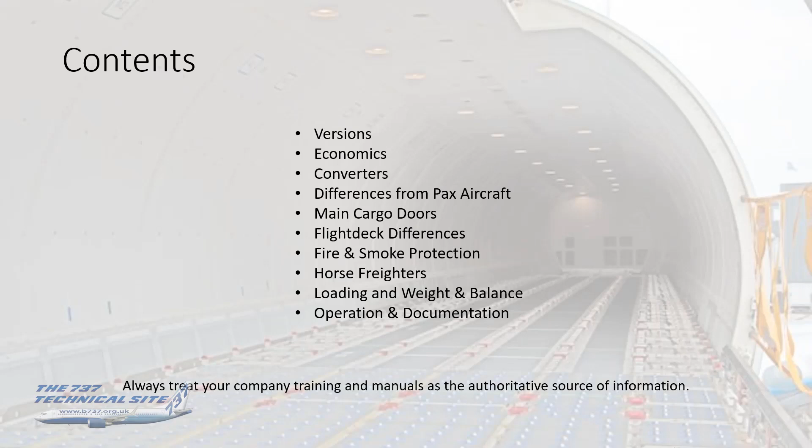Okay, so on with the show. Let's look at the different versions of 737 cargo aircraft there have been.

First of all, let's get this out of the way: are they freighter aircraft or cargo aircraft? The terms seem to be interchangeable. In English, a freighter is the aircraft and the cargo is what's carried in it, but the two terms do seem to be interchangeable. The reason I raise it is that some cargo 737s have got the suffix C and some have got the suffix F, depending on the model and the converter. I will go through the nomenclature as we come to it later in the presentation.

Pure freighters, or all-cargo aircraft, have the entire passenger deck configured to carry freight and a main cargo door just after door 1 left for pallet loading, as you see in this photo here, looking from the front of the cabin down to the back.

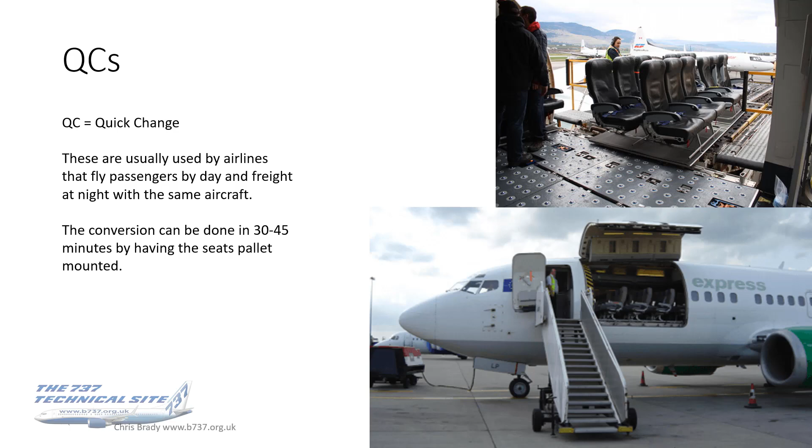So it's the quickest and easiest form of cargo conversion. It takes two people about 10 minutes to do the whole cabin—you just use a regular passenger aircraft, place these fabric hammocks over the seats, and then the team loads mail bags onto them, throwing them on and taking them off at the end of the flight. On these, we used to carry a member of cabin crew as a nominated fireman who sat in the back looking out for any signs of smoke or fire. So that's a kind of hybrid, if you like, cargo aircraft.

Just to summarise the main versions: F generally stands for freighter, a generic name for a pure cargo aircraft. C can confusingly either stand for cargo convertible, usually Boeing terminology, or combi, an aircraft with a passenger and a cargo area. QCs are quick changes, aircraft that can be quickly, in less than an hour, converted back to passenger ops from cargo.

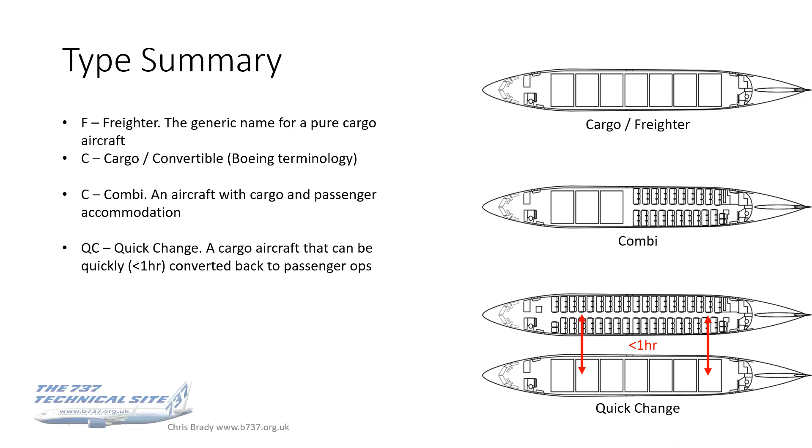So none of the Boeing built originals were pure freighters. They were all either convertible or quick change, which is why the terminology on here is all 737-100 or 200C, covering both C and QC.

I say that they offered these actually before this document - the earliest documentation I've seen was in April 1966, a full year before the first flight of the 737, and the first one was delivered to Wien Consolidated in September '68. So they were fairly quick off the mark in ordering one, and I believe some of those aircraft are still flying in Canada today.

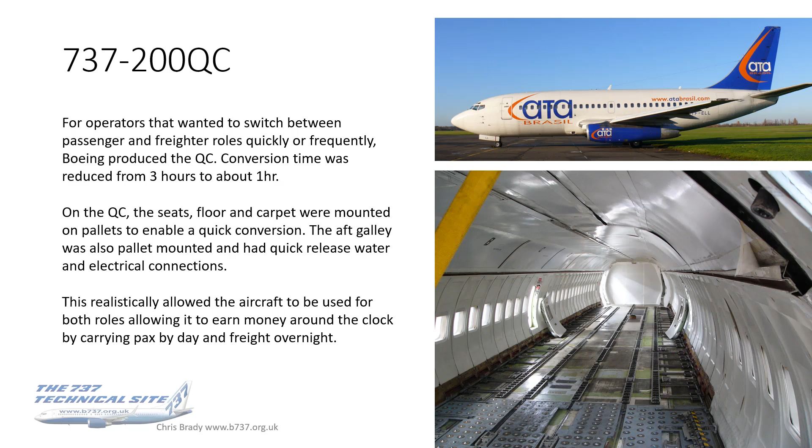So next up were the Classics. Now, surprisingly, Boeing never built a Classic freighter. That said, there have been more Classics converted into freighters than any other generation of 737 - it's just Boeing didn't do it, and it was all done from the second-hand market. Of all the Classics, the 400 is the most successful series, as it's got more cabin volume for cargo, as you would expect. If you're going to make a freighter, might as well make a big one.

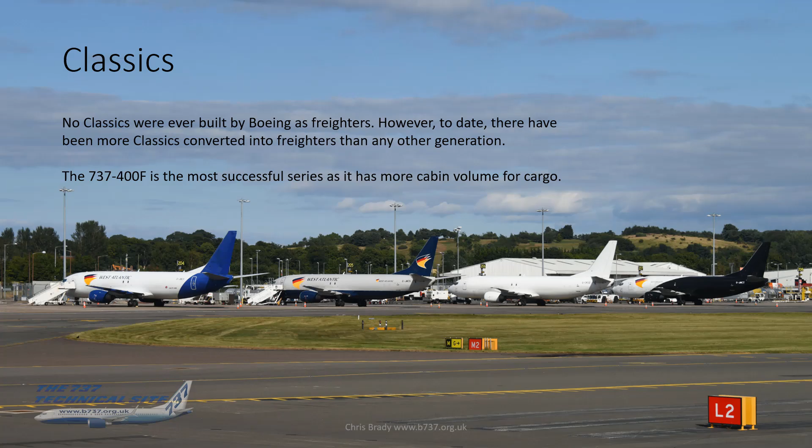So on to the NGs. NGs are now becoming much more popular for freighter conversion than the classics, because of all the same reasons that they became much more popular as passenger aircraft. They got better fuel consumption, payload, and reliability over the classics. And as the NGs are getting older, they're coming down in price as well.

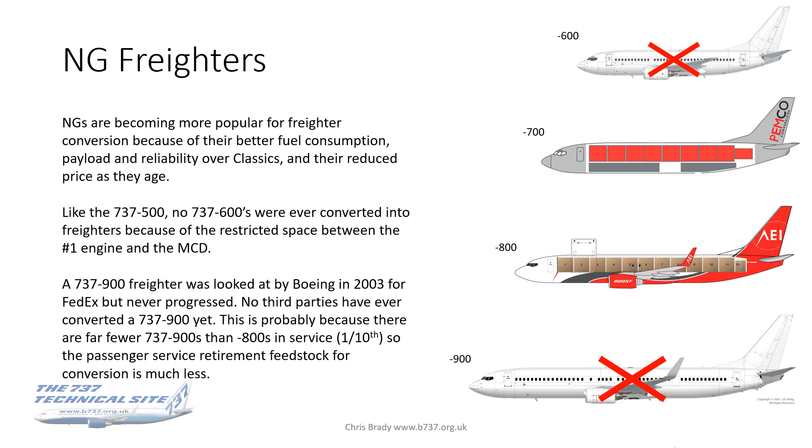Pallet space. So the number of pallets that a type can take actually varies slightly depending on the model. A 700 can take 8 standard AAA pallets and a smaller one behind it. The 800, depending on which conversion was done, and who did the conversion and which particular one you went for, can take anywhere between 9 and 11 standard pallets plus a small one behind that. The 900, if it was ever produced, and never say never, could take one extra full-size pallet over an 800.

All right, so let's look at the 700C. Now, this was the only Boeing produced cargo 737 from new, other than the 200C. So, as I say, straight from the factory, there's only been this and the 200. All the rest are conversions of used aircraft.

The 700C is based on the 700 IGW, the increased gross weight version, which, if you saw the BBJ video that I produced, the BBJ is from the IGW family, as also is the 737-700 ER. The ER, the BBJ, and the convertible all have the 700 fuselage and the 800 wings and strengthened gear, to basically get an economical payload on that. That's what that's all about.

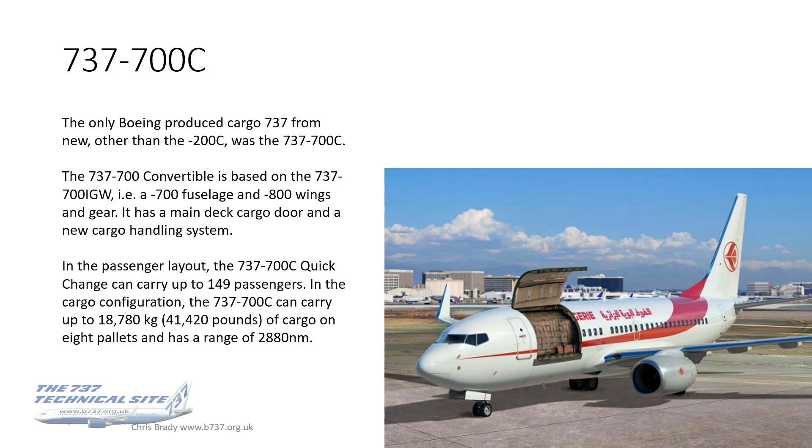It was launched in '97, so fairly soon after the NG program was launched. But it only actually got 3 civilian customers: Saudi Aramco, Sonair, and Air Algerie, which you saw on the previous slide. Last delivery of those was in 2016. The big sales actually went to the US military, where it's known as the C-40, as per this photo here, and one ended up as a BBJC. But total sales were only 21 of those.

Interestingly, if you look at this photo, courtesy of Mark McEwen, you can see that the overhead bins, the hat racks and things, are still in place for this. So that's probably the big difference between the convertibles and the pure freighters, is that the roof space, the ceiling space is more restricted on these. You don't have the full ceiling height.

There is a quick change option, again with pallet mounted seats. This reduces the conversion time from 5 hours on the 700 down to about an hour. As previously mentioned, and as you can see in this photo, the ceiling, sidewalls, and overhead bins remain in the interior when the aircraft is both configured and used for cargo operations.

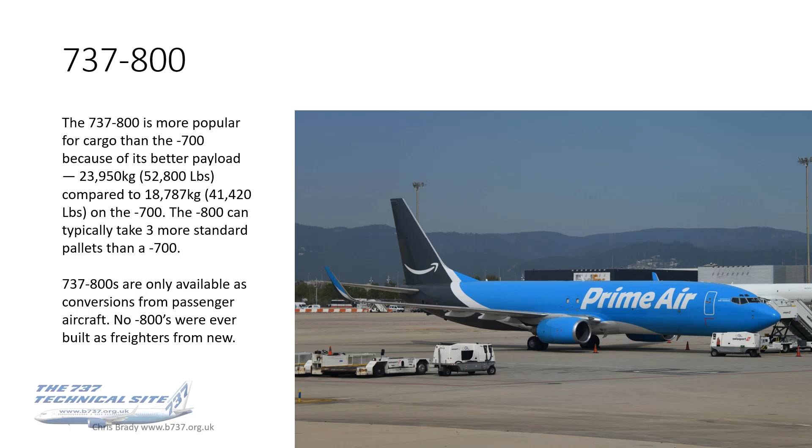Max freighters - these are a long way off. There are no plans for Max freighters yet, either new or converted, and this is simply due to economics. The Max is still young, and it can earn a whole lot more as a passenger aircraft than it ever could as a freighter. Also, there's just no second-hand Maxes on the market for conversion yet. I think it's just short of a 3,000 aircraft backlog on the Max at the moment, so there's certainly none going to become available for freighters. I would estimate within at least a decade, if not 15 years or so.

So we've mentioned the economics of passenger versus cargo aircraft. Let's have a quick look at that, and hopefully we can work out why cargo aircraft are generally older than passenger ones. Cargo aircraft are very rarely manufactured new straight off the production line. There were 90 odd 200s and about 20 odd 700s out of 15,000 737s, so it's a tiny minority that were ever made new. Usually what happens is they operate as passenger aircraft for 10 or 20 years before being converted into a freighter.

Why is that? Because they can earn more money flying passengers than freight. And why is that? Because passenger flying is much more intensive - it's more round the clock, it can be 24/7, depending what airline you work for. Fortunately, I haven't had to fly for one of those. But freighters typically only fly about maybe 4 hours a night for 5 days a week. There's very little freight movement at the weekend - it's mostly midweek, mostly in the middle of the night.

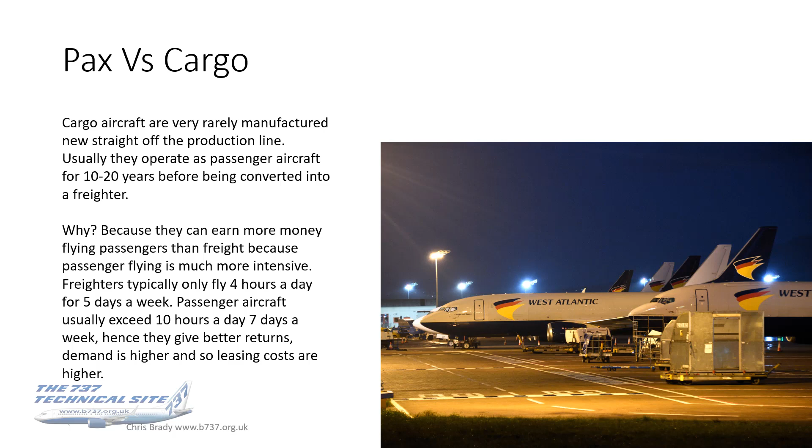Passenger aircraft, though, work from - well, I don't need to tell you what your rosters are like - but an early shift can start around 5-6 in the morning, and you can be flying up until 3 the following morning. So the passenger aircraft will put in at least 10 hours a day, often more, 7 days a week. So they give better returns for the money, because they're simply doing more flying. Because of that, demand is higher, and so the leasing or purchase price for 737s is higher on those aircraft.

So let's have a quick chat about leasing costs. In case you don't know, very few airliners are owned outright by the airline. Usually what happens is an airline may place an order with the manufacturer, and they may even buy it from the manufacturer. But certainly the airlines I've worked for, what happens is you do this sort of sell and leaseback process - you buy the aircraft from Boeing, then immediately, before you've even taken delivery of it, you sell it to a leasing company like GECAS or whoever, and they then lease it back to you. So why is that done? Because airlines just don't have the amount of money in the coffers to buy a fleet of aircraft outright.

So they lease - same as you might do with a car, depending on your financial situation.

Most aircraft are leased. As the aircraft get older, their leasing costs, or the outright purchase price, drops. When it reaches a figure that the freight market will sustain - and going back to the previous slide, freight margins are tighter than passenger margins - the aircraft get converted into freighters.

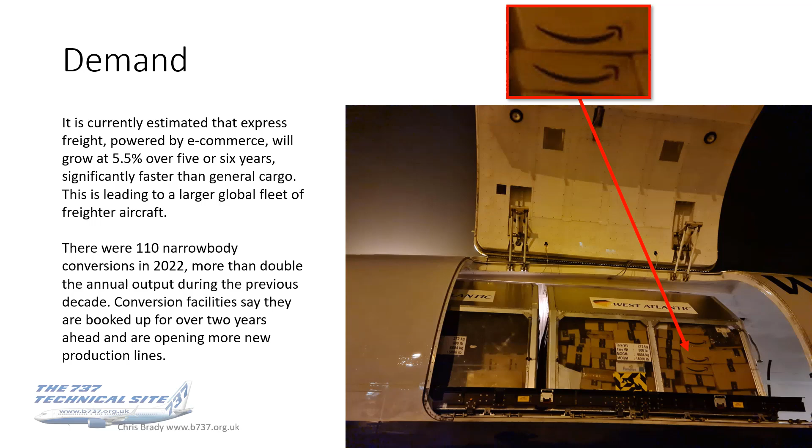Conversion facilities say they're booked up for over two years ahead, and they're opening more new production lines all around the world - on almost a monthly basis, to be honest, between all the converters.

So we've spoken about leasing costs, but let's have a look at the outright cost of a freighter. You can buy a 20-year-old used 737-800 for around $15 million, give or take. The P2F - passenger to freighter conversion - is around the $3.7 million mark.

You will probably want to do a C check on it too, the heavy maintenance check, because that's probably going to be due, and it's a good time to do it while you've got the aircraft stripped apart. In fact, it's probably part of the reason why the aircraft became available on the market anyway - the C check was coming up. So either end of lease or conversion to a freighter is the perfect time to do a C check.

So for about 20 million, you've got a converted freighter, whereas the cost of a late-build, say 5 to 10-year-old 800, is over twice that amount. So it actually makes good economic sense to convert to a freighter.

Most of the aircraft being converted at the moment are 737-800s. At the moment there are 121, give or take, probably slightly above that now, active aircraft, 47 pending conversions, and I'd say that number's definitely gone up, probably nearer three figures now. And the 33 in storage, again I compiled this data 6 months ago, I'd say there will be less than half of that in storage now.

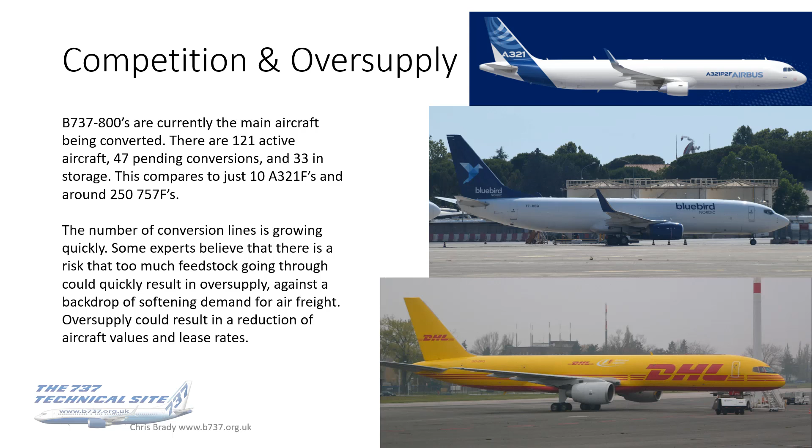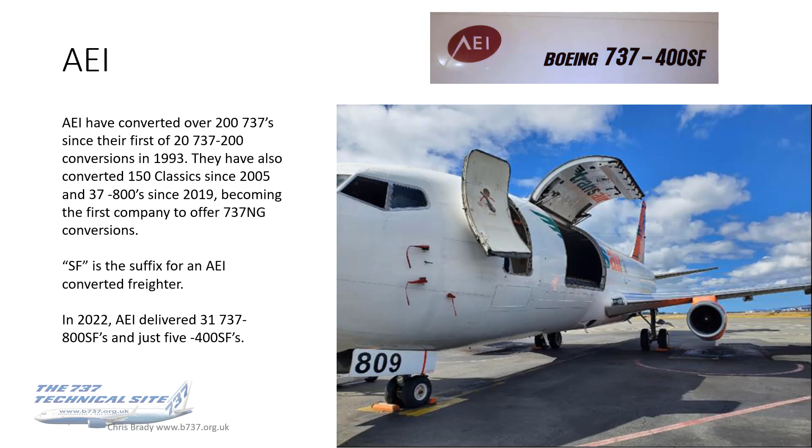AEI's big selling point compared to our 737-400 conversion is that we change all the floor beams after the wing box, because it's a cleaner, faster solution than the one we employed on the classics. Otherwise, the conversion is similar.

Great quote from Bob Convey from AEI: "Freighters like pickup trucks - you want them simple and reliable, especially a converted narrow body." Love that quote.

They've got conversion lines in Florida, Alabama, Canada and China, both with STAECO and HAECO. Conversion takes between 100 and 120 days, depending how it goes and what maintenance work you want to integrate into the job as well. The specs for the 800 conversion are as shown, and that's just straight data from the AEI website.

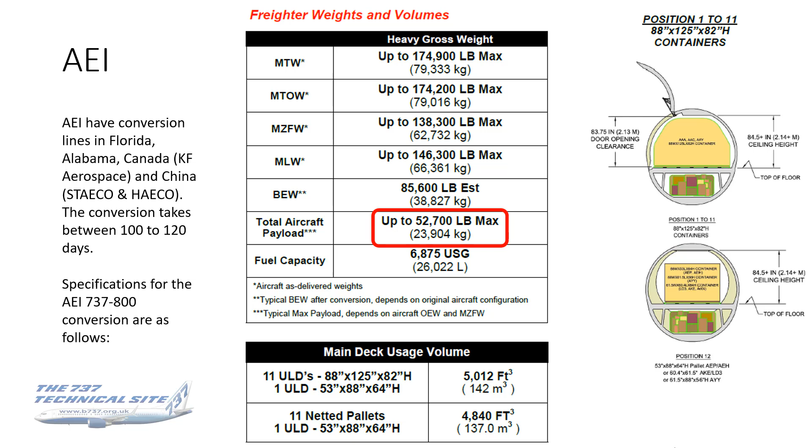AEI is currently the only conversion company to have ETOPS 180 approval on the 800 freighter conversion. It can convert all 800 line number aircraft, including those with a flat aft pressure bulkhead and split scimitar winglet, but not non-winglet aircraft - so almost all 800s it can do. There are very few of the early ones, and that's again just a wing loading issue with the weight.

AEI's conversion cost is roughly $2 million less than Boeing's BCF, so that's another selling point for AEI.

IAI Bedek - you may not have heard of them, but they are around. They're a good steady producer of conversions. They're based out in Tel Aviv, and their first conversion was for the American market, this one here, Kitty Hawk Air Cargo, and that was a 300 delivered way back in April 2005. Their first 400 was delivered in 2009. Now they don't do classics anymore.

They only convert the 700 and the 800. All aircraft converted by IAI have got the suffix BDSF, which stands for Bedek Special Freighter. The stats and specifications for the BDSF 700 and 800 series are shown there.

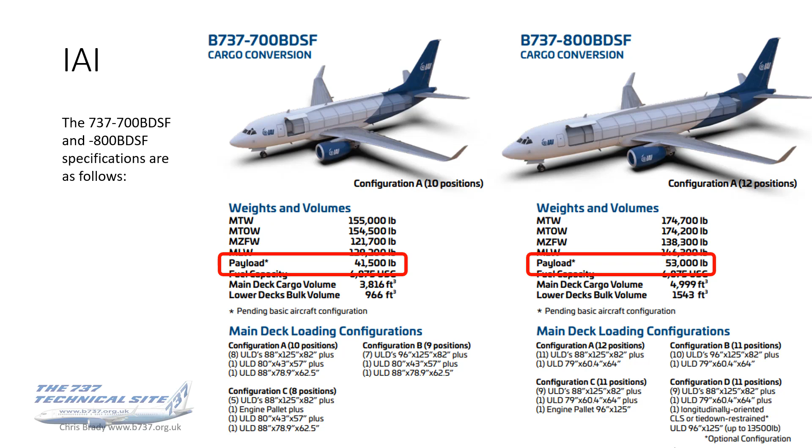So there are, well, you can see there are 4 different configurations for the 800. I'll come on to how many pallets can an aircraft hold later, but if you just keep this in the back of your mind, the answer is not clear cut or straightforward - it's variable depending what you as the customer want.

Okay, and then Boeing's BCF, Boeing Converted Freighter. I say surprising latecomer to the market. The first one was completed in April 2018 and delivered to West Atlantic, who proudly sport the first 800 Boeing Converted Freighter logo on the tail. Boeing said that for the first time, operators get one-stop shop support through the life cycle of a narrow body freighter, originally manufactured by Boeing, converted by Boeing, and supported by Boeing. This really is Boeing's big selling point - it's all in-house support.

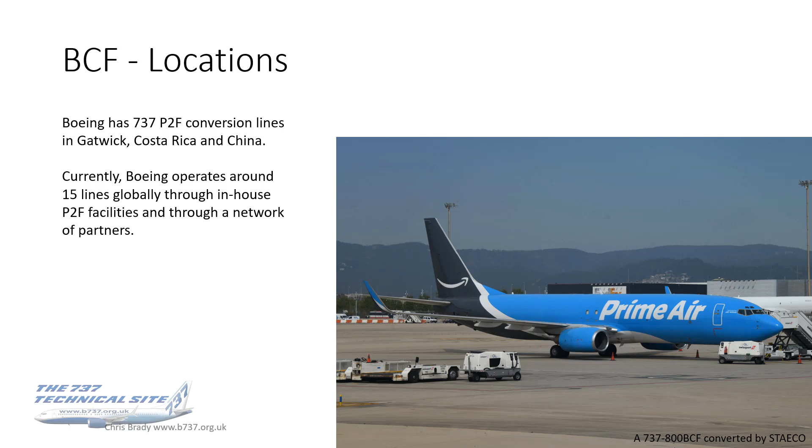Conversion lines are in Gatwick, Costa Rica, and China. There are 15 lines at those 3 conversion centres, through in-house P2F facilities and through a network of partners. As I say, the big selling point for Boeing is support.

This, as they say, includes fully integrated manuals accessible through MBF, which is My Boeing Fleet. So this is the portal where we get all the documentation - everything from FCOMs and QRHs and AFMs to all the maintenance manuals, wiring diagram manuals, everything. It's all in one place, rather than in separate manuals written by the STC manufacturers, like AEI or IAI or Pemco or whoever. You've got spare parts commonality with production freighters as well.

Summarising the nomenclature, so for the 700s there have been Cs, which are convertibles - the new ones as built by Boeing, the IGW aircraft with 700 fuselage and 800 wings. QCs are quick change, so pallet mounted seat version. C40, A, B and C is the US Navy, what they call the 700C, and the BBJC was basically a one-off BBJ.

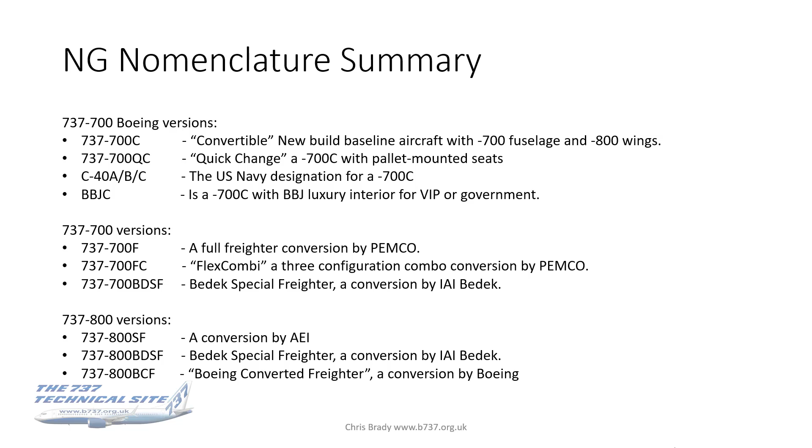So the main cabin. This photo is actually of a 200, but it doesn't really matter. As far as the cabin goes, it's empty. The seats, the overhead passenger panels, lights, call bells, PSUs, loudspeakers, air vents, all of that stuff that's normally over your seat when you sat in as a passenger, all that's gone.

The aft galley's gone, the aft toilets are gone, all removed for space and weight savings and for simplicity. There's less stuff to go wrong. So all the pipe work's taken out, from the aft toilets through to the front.

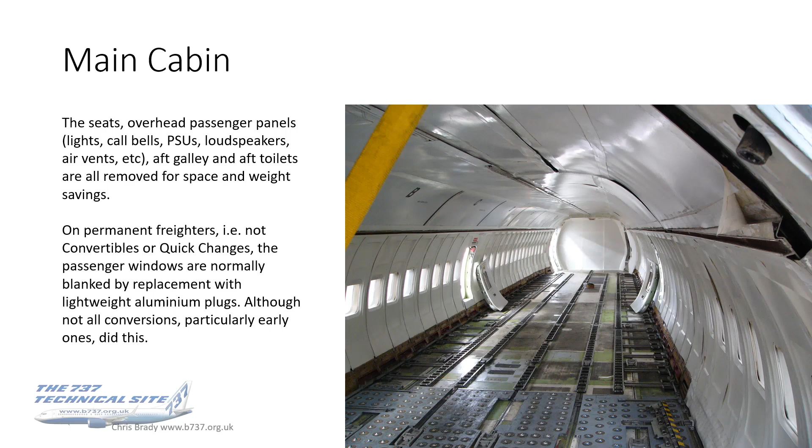On permanent freighters, not convertibles or quick changes, the passenger windows are normally blanked by replacing them with lightweight aluminium plugs. This one, well, it's a 200, so they were all convertibles, so that's why the windows aren't blanked. Although not all conversions, particularly the early ones, did that.

In front of the main cabin is what's known as the supernumerary area. Now these are quite different from each converter, and they're also different from generation to generation. So a 300 by AEI will look different to an 800 by AEI in the supernumerary area.

The maximum number of supernumeraries may be reduced from 4 or 5 or what have you for ETOPS operations. So again, check your FCOM and your AFM for details about that. But what I'm saying here is, just because there are 4 or 5 seats there doesn't mean to say that's how many you can take, because if you're operating an ETOPS flight, it may be less.

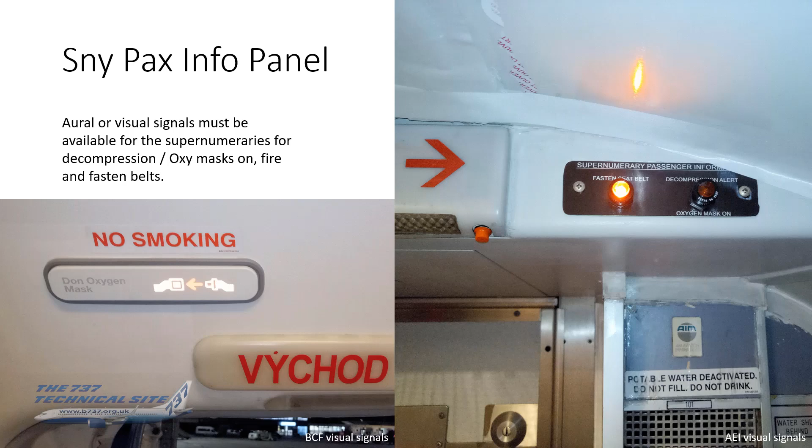The BCF has got a system called MDAS, and depending which document you read, the maintenance manual says MDAS stands for Main Deck Access Signaling System. The FCOMs say it's Main Deck Alerting System. Anyway, whatever it is, we know what it does. It uses the main deck cargo ceiling lights and warning horns to signal to the main deck occupants to return to the supernumerary area. Okay, let me take you through the various functions and meanings.

So the first one is in turbulence. In turbulence, we in the front would switch the seatbelt signs on. On a regular passenger aircraft, that would just switch the fasten belts sign on. On a BCF aircraft, it will cause the main deck ceiling lights to flash on and off for 30 seconds. So that is a visual signal to the supernumeraries to go back to the supernumerary area if they're in the cargo area, back into the seats and strap in.

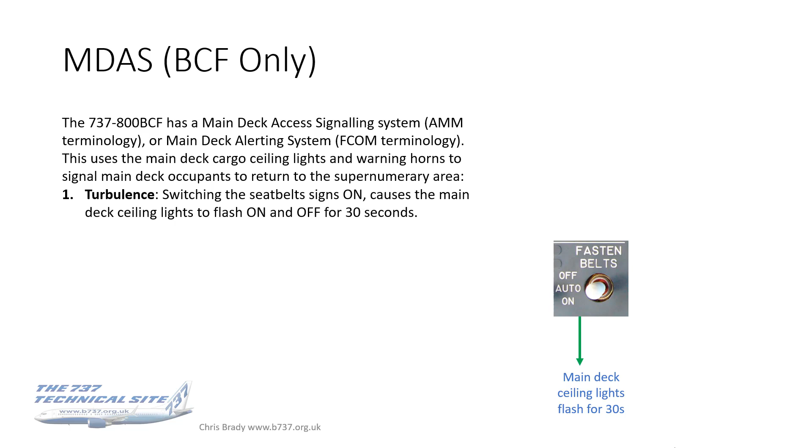If smoke is detected, the main deck cargo compartment warning horns will sound for 10 seconds and the main deck ceiling lights will flash on and off for 30 seconds. This is an automatic function, coming straight from the cargo panel. We don't need to do anything for this; if smoke is detected, the horns will sound and the lights will flash automatically.

If the cabin altitude reaches 14,000 feet, again automatically, the main deck cargo compartment warning horns will sound for 10 seconds and the ceiling lights will flash on and off for 30 seconds.

The final one is don oxygen, stroke return to seat. If we switch the passenger oxygen switch on the overhead panel on, this will manually start the main deck cargo compartment warning horns sounding for 10 seconds and the ceiling lights flashing for 30 seconds. You could argue there's duplication between that and the pressurization trigger. Well, yes, there is, but the idea is you do this before the cabin reaches 14,000 feet if you see a depressurization taking place. If you don't catch it, the aircraft will automatically catch it at 14,000 feet for you. Okay, so that's the MDAS system.

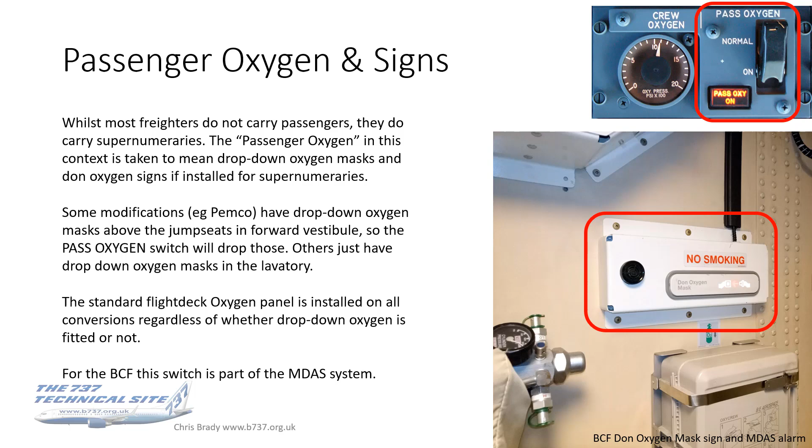On the classics, each jump seat has got its own dedicated mask and portable oxygen bottle, depending on the fit, located just above floor level, as shown in this photo. For AEI classics, there's a second oxygen bottle in the forward hold, connected together, and both of those are for the flight deck only - that's a difference between the AEI classics and the BCF. So the second bottle's for flight deck only on those.

Again, this illustrates the confusion. If you're flying a mixed fleet of freighters from various different converters, there are a lot of different things, a lot of subtle differences to keep on top of, especially if you're flying both generations as well. There are so many different combinations that it does make it quite demanding to know exactly how the aircraft is set up.

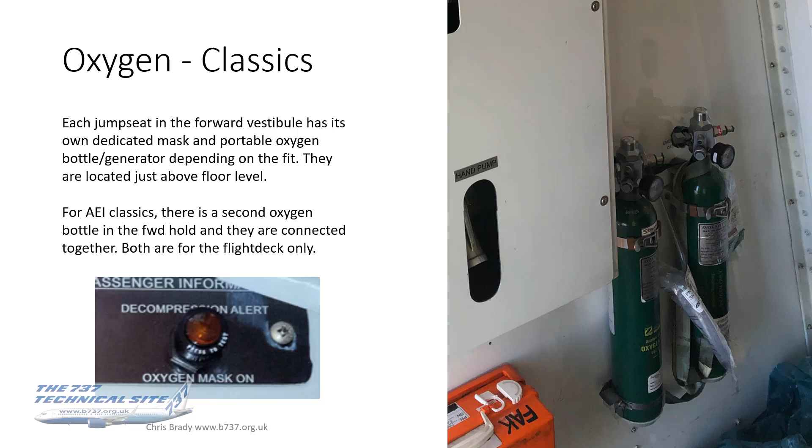On AEI conversions, there's an escape rope for exit from door 1 left, instead of having a slide. It's actually surprising to see how much lighter the door is to operate without the slide fitted. Other conversions keep the slides on doors one left and one right, so they don't need the escape ropes.

It's a fairly rare thing to have the escape ropes, but it is there on some aircraft. Certainly, if you haven't got the slide bustle, then you need to be looking for the rope.

Alright, so behind the supernumerary area, you've got the 9G barrier. Now, on early aircraft, and by that I mean 200s and some classics, the barrier was a net, like you see in this photo here.

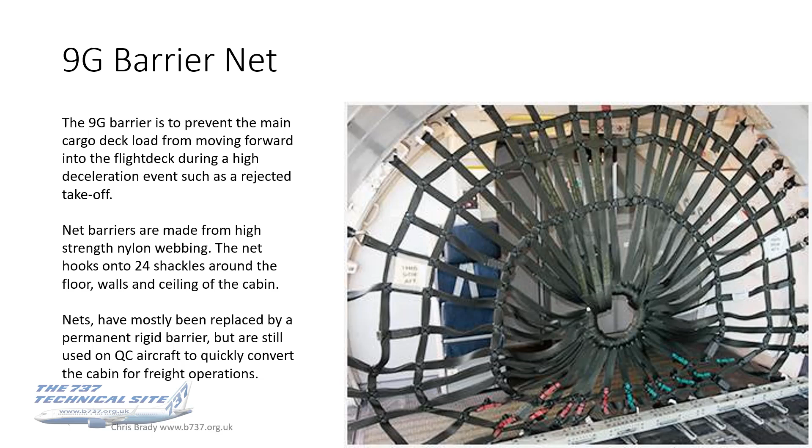The net barrier has been replaced by and large by these rigid barriers, and there are two big advantages of them. One is that they don't distort when under load. So if you have a 9G event or less, the net will distort as the load goes into it. This won't - this is pretty solid, and that allows the couriers or supernumeraries to sit in front of that barrier. So it makes that space in front of the barrier usable.

It's about 4.5 inches thick, depending on which conversion you've got. And the other big advantage of it over the net is that it acts as a smoke barrier when the door's closed. So there should be a placard there for couriers to keep the door closed unless accessing the cargo area, and of course, in the event of a fire.

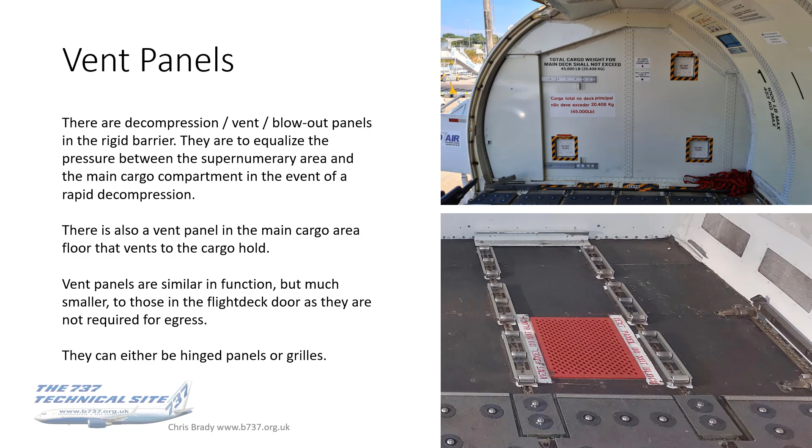The intention here is clearly that it shouldn't be routinely used for access between the areas. You're certainly not allowed to use it during taxi, takeoff and landing.

If you go through the door in flight, assuming there's room - because the fully laden pallet leaves only inches of space, but with smaller pallets you might be able to - then you have to carry portable oxygen. That's just a legal requirement, because there's no drop-down oxygen masks there in the main cabin.

So this is called a decompression door, and it serves the same purpose as the vent panels on the other conversions.

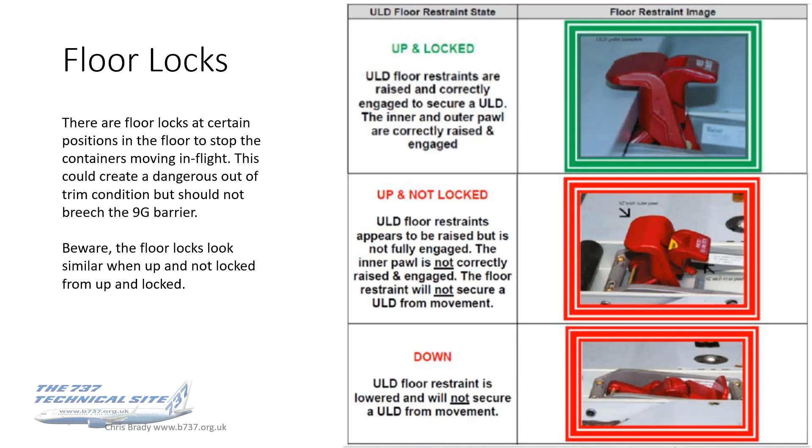Note of caution here: beware that floor locks look similar when they're up and not locked compared to when they're up and locked. It's quite a subtle difference. You can see on the photo there's just a little yellow area to catch your eye. So it's worth checking these wherever possible.

And there's a photo of one in the up and locked position. So they just bite the lip of the container to hold it in place, stop it moving around.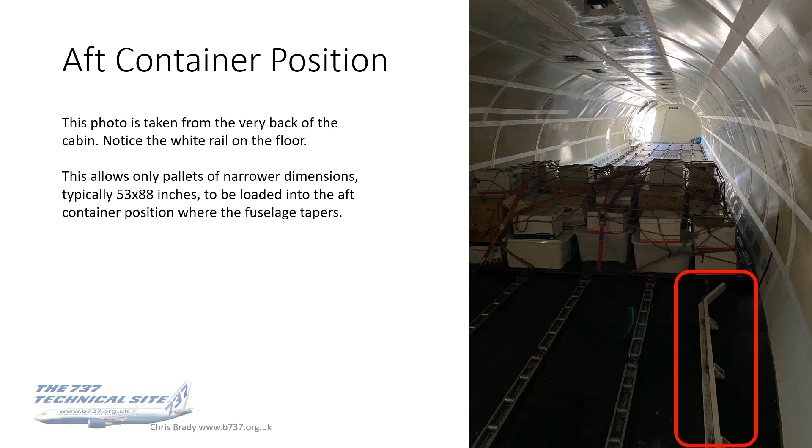The ceiling height is raised to 84.5 inches, which is higher than a standard 737 cabin. So you'll notice it if you ever go onto a freighter that the ceiling is much higher.

You lose a little bit of floor room by the roller system that's added on, but you gain it on the ceiling, and that's done by removing overhead lockers, sidewall risers, and the environmental ducting. That maximizes the space for containers, and also keeps the necessary minimum 1-inch air gap between the top of any cargo and the smoke detectors. So that extra headroom is quite useful.

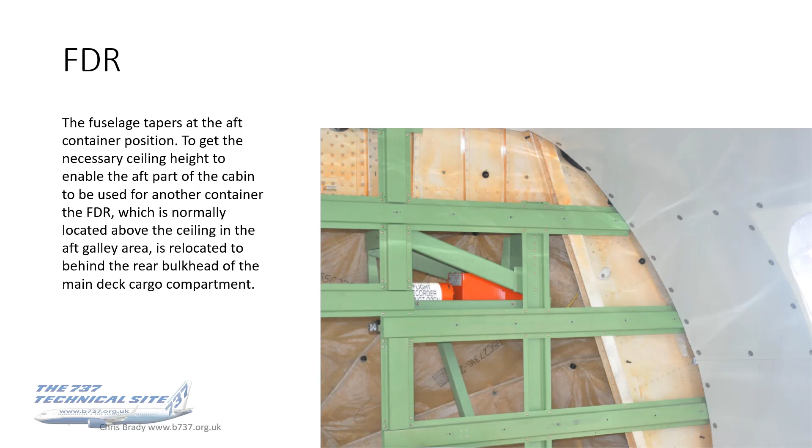it's been moved, so it's actually relocated to behind the rear bulkhead of the main deck cargo compartment, and you can just see it in this photo here. So it's still in a safe location, the most survivable location near the back of the aircraft, and it's well and truly bolted onto that bulkhead, so it'll stay with the aircraft and not be ejected out in the event of an accident, which obviously helps accident investigators find it much more easily.

Floor drains are another difference from the cargo to passenger aircraft. There are 2 drain pans in the cabin floor, one near the front, the other near the back. Each drain pan runs the full width of the cabin, and any water is piped away to either the forward or the aft drain mast. If these weren't here and there was any liquid spillage, that liquid could move about and cause the aircraft to go out of balance. So it is a risk, and hence these drain pans here.

Okay, the aft cabin doors. These are all deactivated on cargo aircraft. They're of no use whatsoever. They're inaccessible to crew, and we obviously don't have passengers needing to use them. So they're deactivated. The slide is removed because it will take up space and be prone to damage or accidental deployment. Some doors have the handle covered as per the BCF on the right photo, and some have got the handle completely removed as per that 200C.

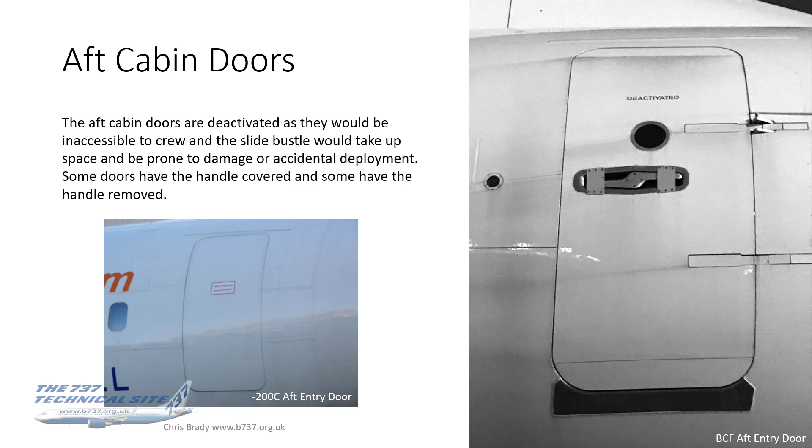So they're both original doors. Obviously the 200C was done new at build, hence I guess why there was no provision for a handle, and the BCF on the right was a conversion. I was surprised the BCF didn't actually remove that handle, but anyway, there it is. They didn't - it's just got those straps over it, so you can't deploy it from the outside.

Okay, the main cargo doors. These are the big difference. Various names: main cargo door, main deck cargo door, or side cargo door - it's all the same thing. It's got to be large enough to take a standard AAA or AAI ULD pallet, that's 88 by 125 by 82 inches. If it can't take a standard pallet, it's no use. The doors are hydraulically powered, and the hydraulic source, control panel and locking mechanism varies from version to version. I'll go through those with you, but they're all different, which is a pain. They're also different between series, between generations, sorry.

So let's have a look at the components. This is an AEI NG main cargo door. As I say, they all vary slightly with each converter and even each generation, but they've all got the same basic components. You can see the big actuators there at the bottom. It's got lights, a vent door and hooks, and a torque tube to engage the hooks into the latches.

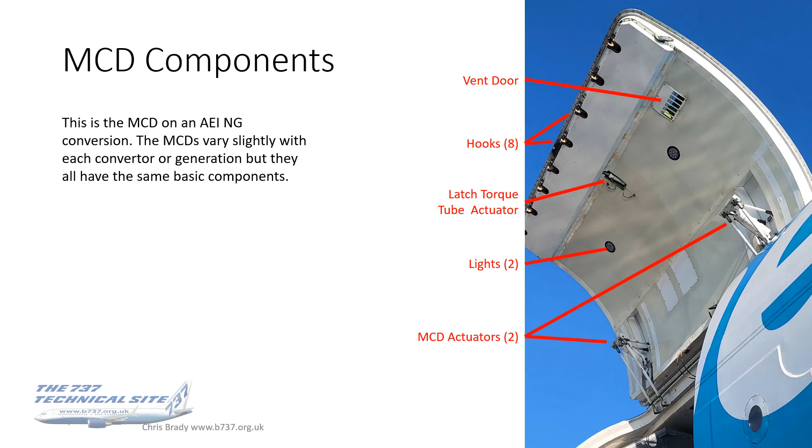Lights there - a pleasing nighttime shot showing those. I'm not sure how effective they are, but they're certainly better than nothing. Usually the cargo aprons are reasonably well floodlit, but if not, you've got those in the door. The precise location of the lights, again like everything else, varies with who did the conversion and which generation it was.

The actuators - these are really big bits of kit, very powerful things. Usually there's two of those near the top of the door, and they usually use System A, but some do use a standalone hydraulic system. The IAI conversion uses a single actuator at the aft end of the main cargo door.

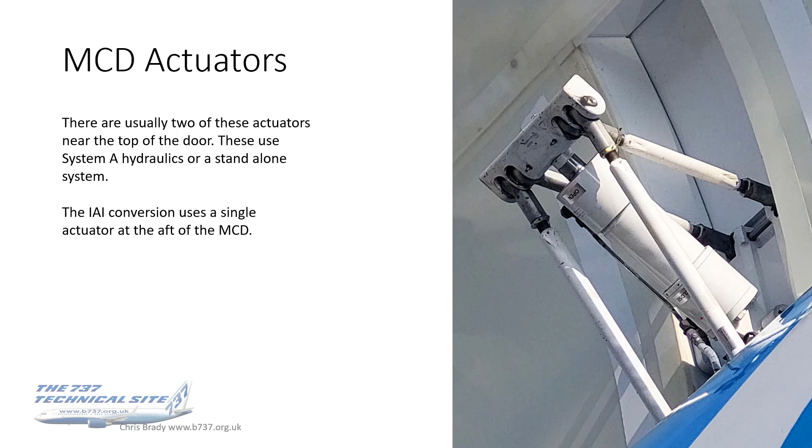Okay, so just a short video showing the closing, latching and locking of the cargo door.

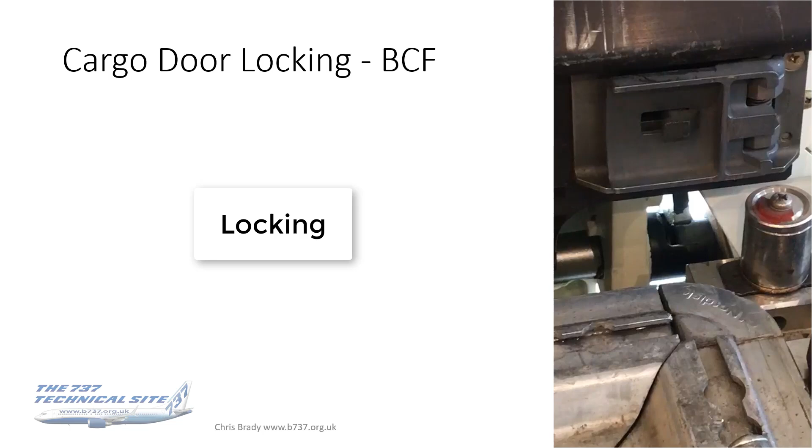Inspection windows, once the door is locked, positive locking of the door can be verified from the ground or from inside the aircraft if accessible, by looking at the inspection windows on the lower edge of the door. When a door is locked, you get a green bar in the windows. When not locked, it'll be a red bar.

These vary from conversion to conversion. The AEI conversions have got a torque tube viewport as well, and 2 lock pin viewports on the main cargo deck, on the cargo door. The yellow and black flag in the torque tube viewport means the door is locked, and these lock pins should be visible through the latches in the lock pin viewport.

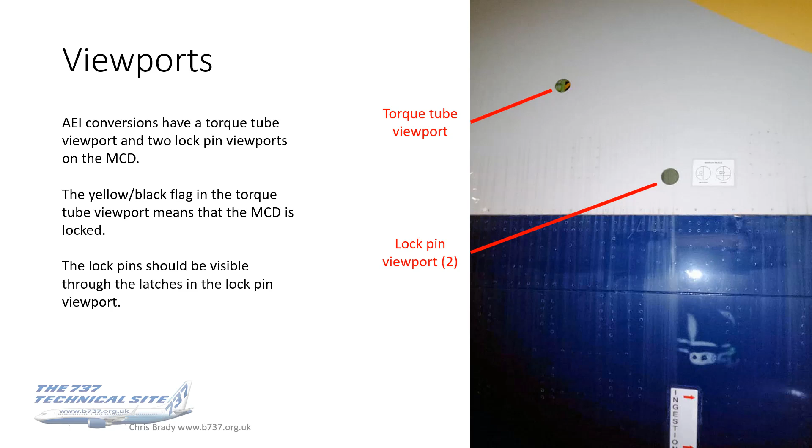On the BCF, again, slightly different. You've got a yellow circle in the inspection window when the main cargo door is locked and latched.

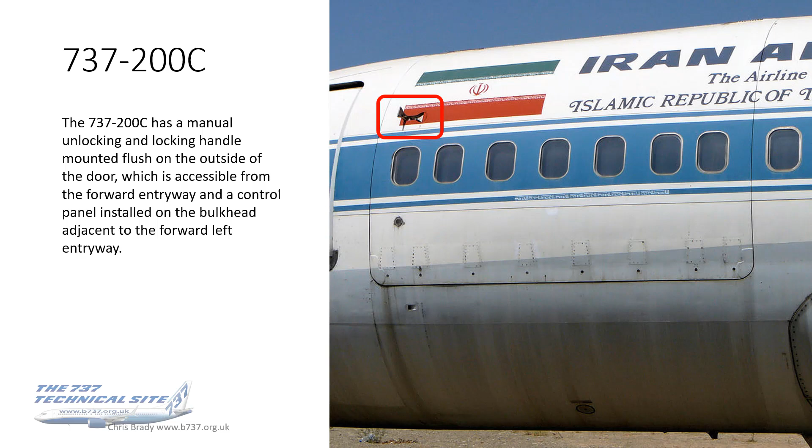And on the 200C, it's different again. The 200C uniquely has got a manual locking and unlocking handle, usually flush mounted on the outside of the door, which is accessible from the forward entryway, door one left. There's a control panel on the bulkhead adjacent to that entryway. That's a photo of that manual unlocking handle in the open position.

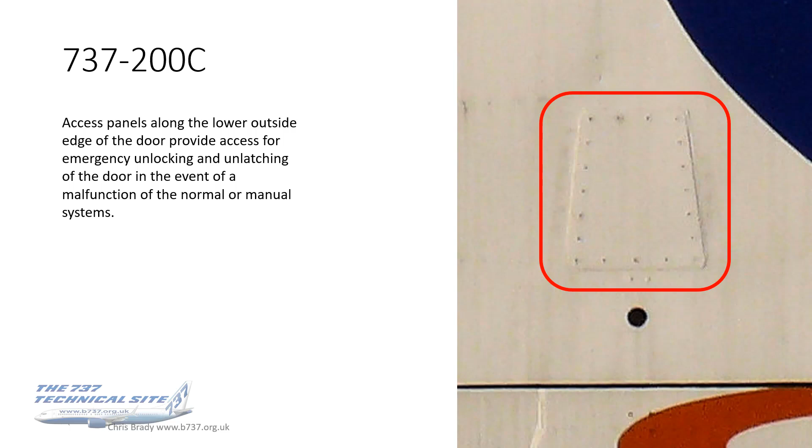At the bottom of the door, you've got 8 latch hooks which pull it closed and latch the pins to the latches. There are access panels along the outside, so in an emergency, if the system is malfunctioning, the engineers can just open these access panels and manually unlatch the door. And you've got viewing windows just below the access panels.

These are to prevent pressurization of the aircraft in the event that the main cargo door isn't fully closed, latched, and locked. It's just a mechanical lever, so when the door is closed, latched, and locked, the vent doors will close, enabling pressurization. If it's not, the vent doors will be open. All the classics had 2 vent doors, and all the NG conversions have just got a single vent door. The originals didn't have any.

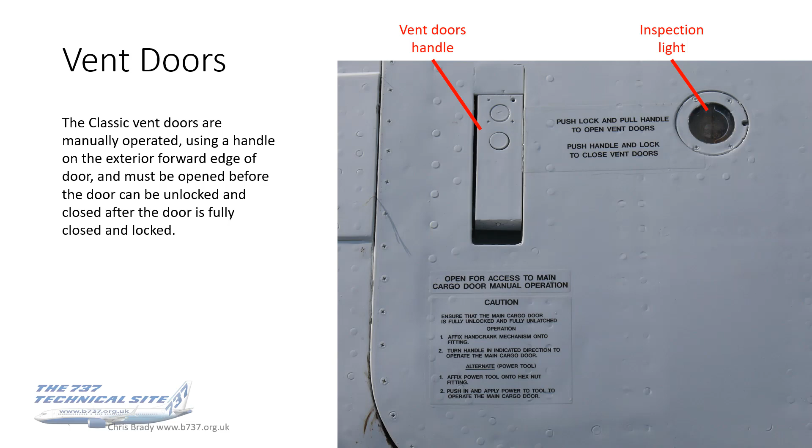The classic vent doors are manually operated. They use a handle on the forward edge of the door. It's got to be opened before the door can be unlocked, and closed after the door is fully closed and locked. All the instructions are usually there on decals, if they haven't worn away.

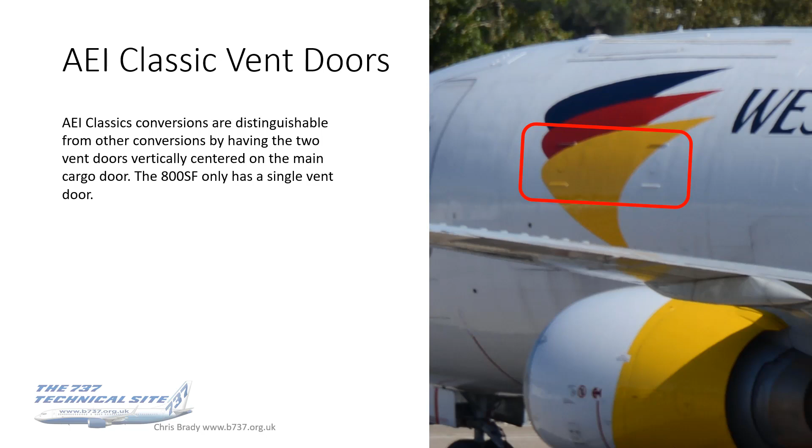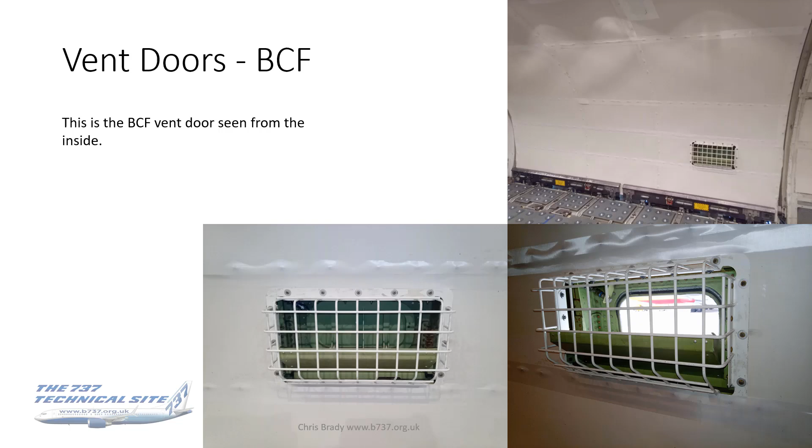The NGs, and in this case a BCF, have all got a single vent door. That's the vent door on the BCF. From the inside, you can see it open and close. It's just got that cage around it to prevent anything fouling it and stopping it from operating correctly.

If AC electrical power is not available to pressurize the B system, then the main cargo door can be opened or closed using a hand pump in the wheel well. Heaven forbid - I guess that would only be if the APU was inop and you didn't have ground power. Then I'm also guessing that would be the FO's job to go down there into the wheel well and turn the appropriate valves.

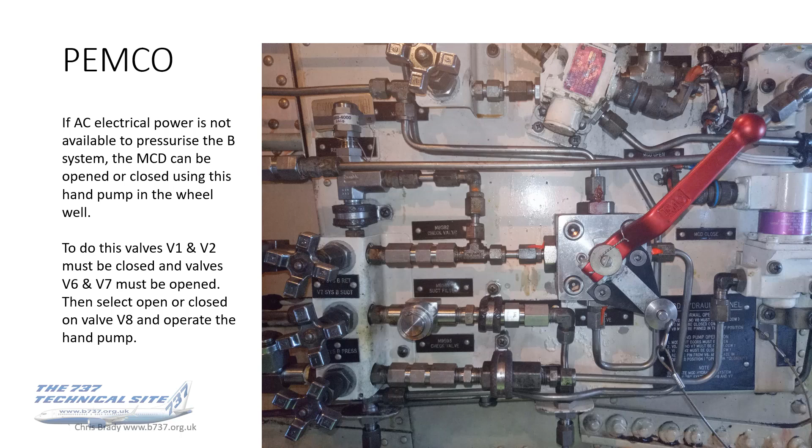Which you can see on the left-hand side of the photo. It's unbelievably complicated, but valves 1 and 2 must be closed, valves 6 and 7 must be opened, then select open or closed on valve 8, and then operate the hand pump. Really, I think I'd be calling for an engineer to do that for real. But there you go - that's it, and that lot's in the wheel well.

To close it, you hold the door control switch to the closed position. When it reaches the closed position, the main cargo door not closed annunciator should extinguish. When it reaches the full down position, the torque tube rotates. The latch hooks move onto the spools over center, pull the cargo down into the latch position, and that will extinguish the hooks unlocked and latches unlocked annunciators.

The gang bar actuator then comes next. That pushes the latch lock pins into place in all the latches. That will extinguish the latch lock pins not engaged annunciator, and then it'll close the two vent doors, which extinguishes the vent door open annunciator.

Sequence of lights for extinguishing is 5, 4, 3, 2, 1 - so at least that bit's simple. You don't really have to remember the process or even the sequence, they've just numbered it: 5, 4, 3, 2, 1 for closing, 1, 2, 3, 4, 5 for opening. But there it is, there it is.

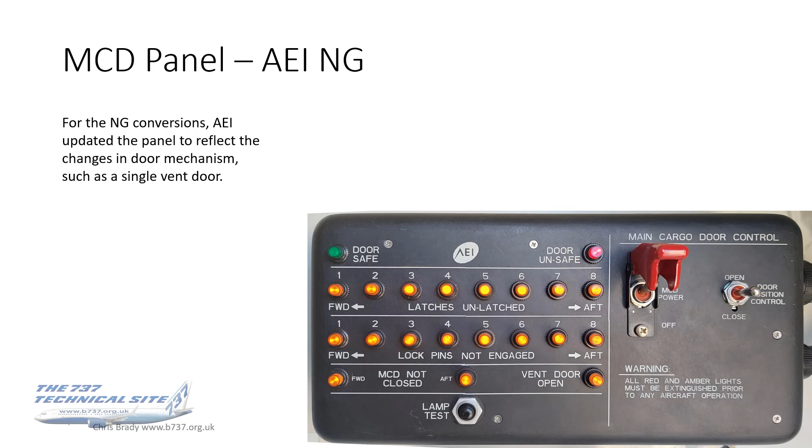Pemco say, of course, that their modification, which uses the B system, results in the most reliable system and elimination of costly independent pump overhaul. So there you go - that's Pemco's take on it versus AEI's. You pays your money, you takes your choice.

They're both very good systems, and obviously each converter is going to try and say that their system's better than the other. I personally cannot see why one is any better than the other or not. I'm completely agnostic about it all.

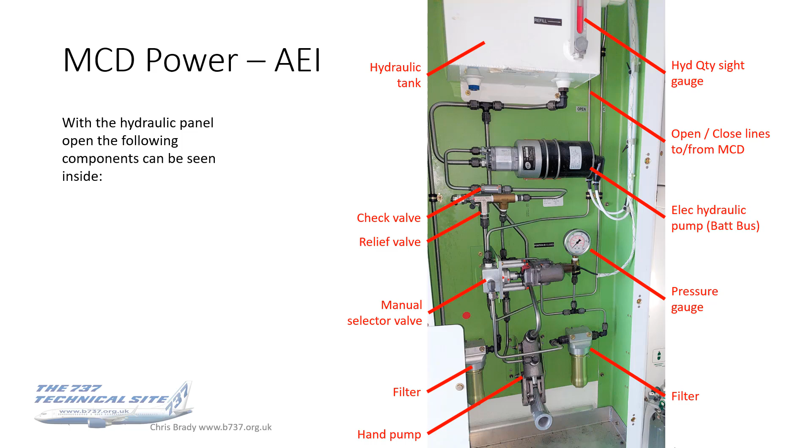The BCF panel - it's obviously a different layout yet again. Main difference here is that for the open/close switches, you've got canopy and full open position switches rather than the single close/open switch. I'm not sure why the others don't have that, but this is just the direction that Boeing went.

You can bet that Boeing had a very good look at the other three converters before coming up with this arrangement. So certainly it looks more simple, and it seems to have that little bit more functionality in giving switches the option to go up or down to canopy and then up or down to full open.

There's a motor control valve, which you can see here, just on the right-hand side after the wheel well in that inset photo. That gives hydraulic power to open and close the door for normal and manual operation. As I say, it's located in the lower right aft wing body fairing, in the same area as the standby hydraulic pump and brake accumulator. If it needs to be opened manually, the valve must first be moved to the open position, which is shown there.

And if AC electrical power is not available, so again this would be the no APU, no ground power case, to pressurize the A system you get back into the wheel well and use the hand pump.

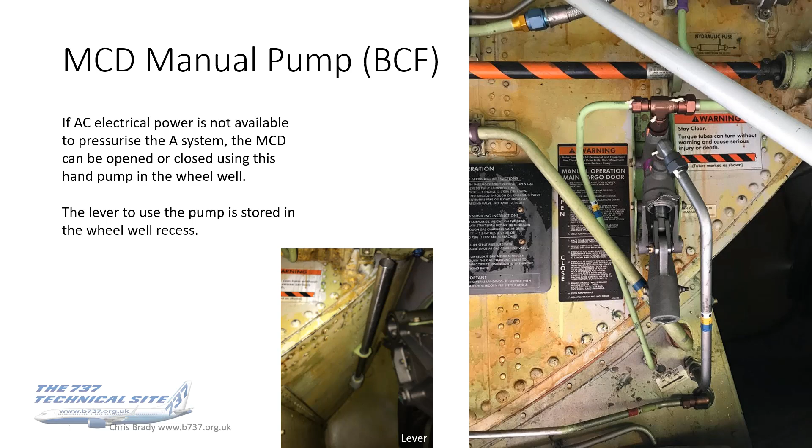And finally, IAI's panel, yet another different layout. It's located just after the left forward entry door, mounted on the fuselage. There it is, so it's where the stairs, or the air stairs panel usually is.

Again, it's straightforward in that you've only got one. You've got an arm button, and then you've got an open close button there.

I guess it would just be confusing if you were operating a mixed fleet, because there's at least 4 different panels here. So if you've got a mixed fleet of them, it just requires a little bit of care and attention to understand exactly what it's telling you, and what it might be telling you if it goes wrong.

Now the main cargo door has got wind limits, because it's a huge thing to catch the wind. These wind limits are different for, again, almost every conversion. And they are also different between classics and NGs.

Just to give you some examples, and this is not an exhaustive list, but the Pemco classics that you can see there, the main cargo door can be opened in any position in wind gusts up to 60 knots, only if the aircraft is pointed into the wind plus or minus 5 degrees and both actuators are operational. Well, how you can guarantee you would be within 5 degrees of the wind in gusts up to 60 knots, I don't know. Practically, I don't think that is achievable.

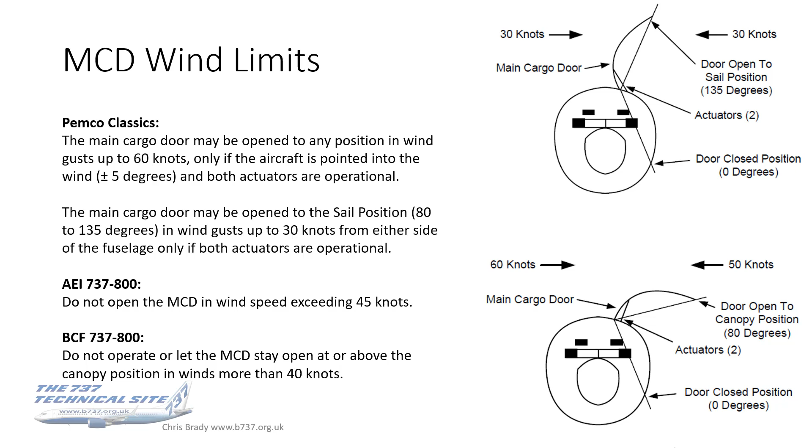So I guess tying it into the wind limits is, why are there wind limits, and what has been done to increase these wind limits, because the wind limits can be quite limiting, and no STC or no converter wants to have the most restrictive wind limits, otherwise nobody's going to go and get their conversions done with them.

Like everything, when you're choosing a new car, a new aircraft, or new whatever it is, you look through all the specs, and you just compare like with like as best you can.

So the people who do the conversions actually strengthen the area around the main cargo door, and really this is done for two reasons. One is because that's the area that's going to get a lot of impact damage as the bins are moved on and off the aircraft. They will, sure as God made little green apples, they will slam into the side of the aircraft, no question about it.

The other reason is the one I was talking about before, which is the wind speed limit. If you've got gusting 60 knots of wind, and that door's open, the wind is going to catch that, and it is going to put a real strain on the hinges and the mechanism and the rams which are holding that door open.

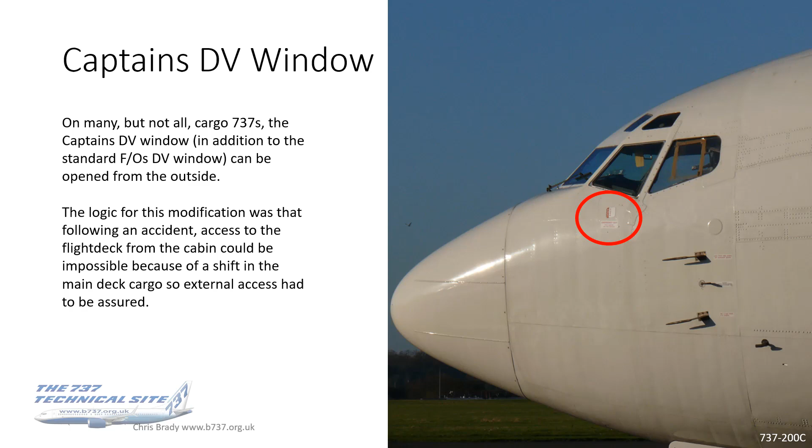Recirc fans. Now, this is the panel on the BCF. Boeing have obviously got a head start on everybody else because they're the original equipment manufacturer. You don't have recirc fans fitted to the 800 BCF. That's because there are no passengers, so the extra flow rate of the fans is not needed.

The pneumatic panel still has the switches. That's just for parts commonality, but they're deactivated and are either placarded in op or here on this BCF version. It's all neatly done with a proper Boeing placard. I don't think that's quite as, let's say, professionally done on the third party STC conversion.

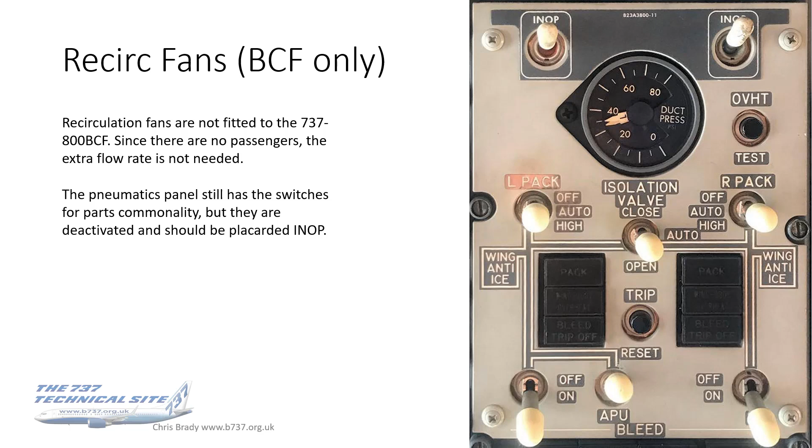The IFE passenger seat switch, well, as all of the cabin fittings are removed, that's deactivated, and that should be placarded in op. The cabin utility switch is still there because the forward galley is still functional.

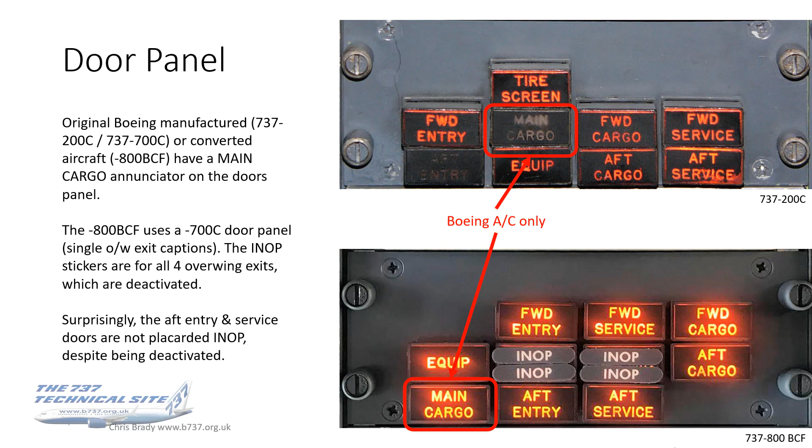So, secondary gear down indicators. This is what you get on the classics. They've got the secondary indications on the aft overhead panel because the main gear downlock viewer is inaccessible in flight because of the cargo pallets. Now these lights are not just repeaters of the main lights, they're actually on a separate independent system, and they're not there on the NG because the NG's already got two independent gear indication systems processed by the PSEU.

So this kind of makes the classic gear indicator into almost like a hybrid NG system, but without PSEU. On the Pemco classics, the secondary main gear downlock indications are on the landing gear panel there. They're only, if you notice, for the main gear, not for the nose gear, because the nose gear viewer is still accessible in the flight deck. For any classic conversion, if either the primary or secondary indications fail, dispatch is allowed under the MEL only if the viewport can be accessed in flight. Now on the classic, that means you can only carry 4 or 5 ULDs out of a possible 9 or 10, which makes you very unpopular with the customer. So really the aircraft would kind of effectively be grounded for cargo operations.

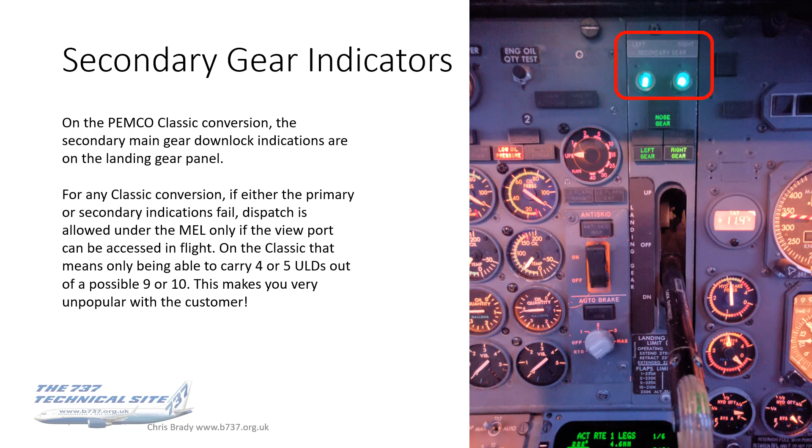If either system light illuminates, then the door isn't safe, and you can push to test all of these to just test the annunciators.

With AEI, there's a cargo door armed annunciator in the flight deck, so that when this isn't open, this is armed, and that illuminates any time there's power to the master control switch on the box. So if you lift that guarded switch, that cargo door armed light will come on, and that's located above the N1 gauges.

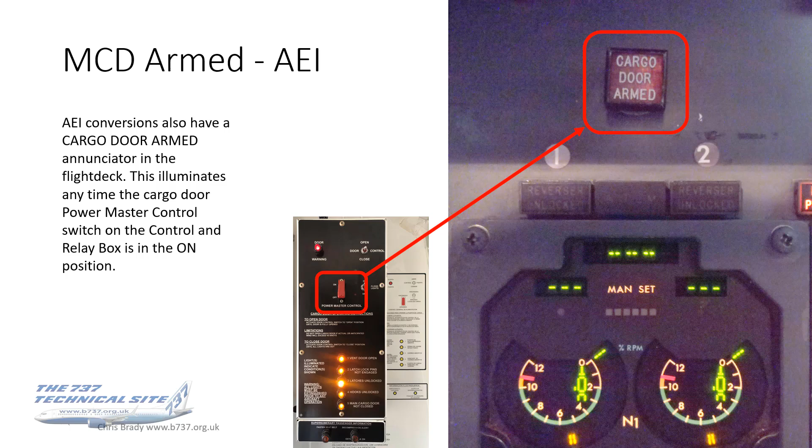All right, a word about fire and smoke protection, because this is quite a big issue with cargo aircraft.

Because you're carrying stuff which you don't usually carry on passenger flights, and the accessibility is also an issue, there are various different classes of cargo compartments from A to F. The ones we need to know about on the 737 are C, D and E. Lower cargo holds are Class C or Class D, and the main cargo deck is always Class E. Class E being cargo aircraft only, for the carriage of cargo.

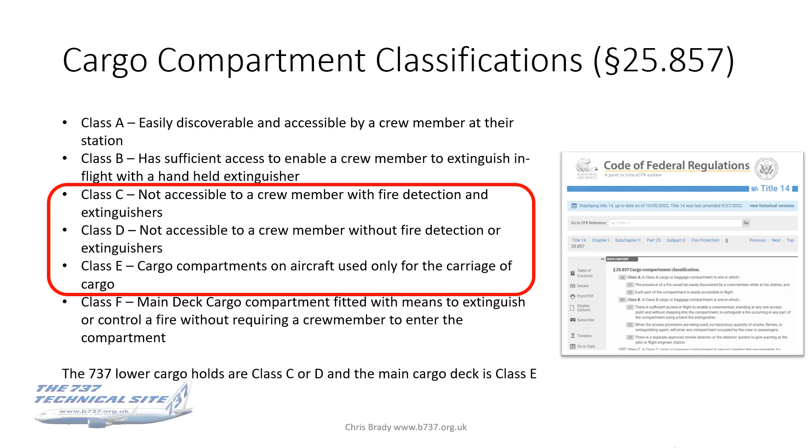Post 1998, all lower cargo compartments have had to be converted to, or made as, Class C or Class E compartments by installing a smoke detection system, a fire suppression system, or both, which makes it Class C, depending on whether the aircraft is in a passenger or freighter configuration. The 737 NGC and QC new build cargo versions, and all cargo conversions since 2001, have got Class C lower cargo compartments and Class E main deck compartments. So everything's all good -- Class D is a sort of thing of the past now.

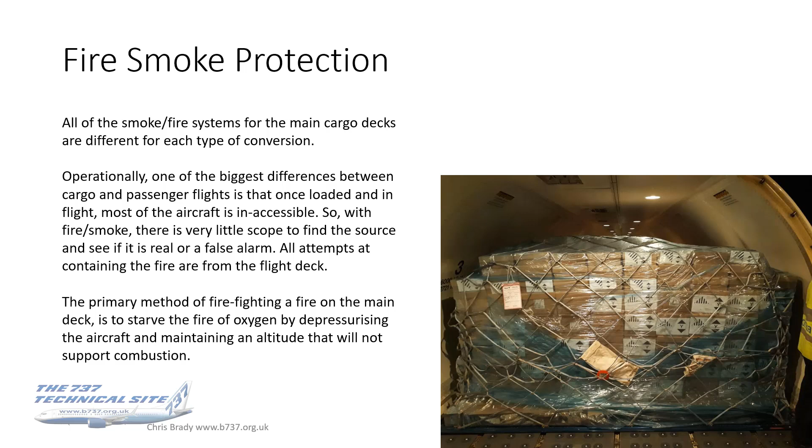So the primary method of firefighting a fire on the main deck is to starve the fire of oxygen by depressurizing the aircraft and then maintaining an altitude that will not support combustion. That's how it's done, and I'll come onto the technique of doing that on the operational things later on.

But staying with smoke detection for the moment, all freighters must be capable of detecting smoke in the main deck within 1 minute. That's by regulation -- that's why there are so many smoke detectors. Multiple smoke detectors in the ceiling, with the precise number anywhere between 10 and 14 depending on the model of the aircraft.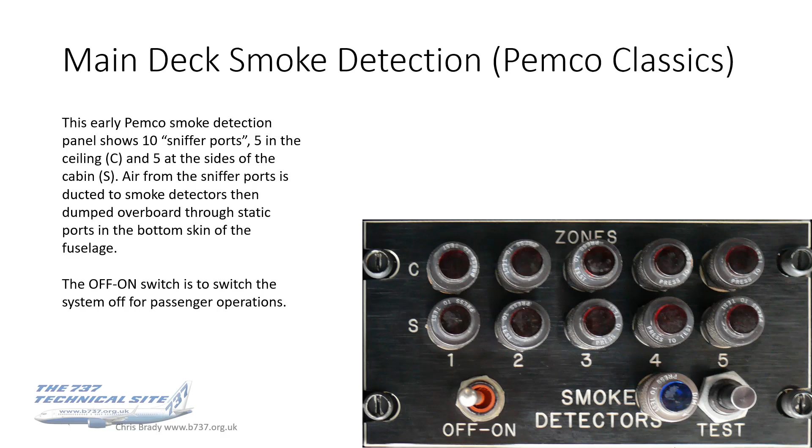You've got 10 sniffer ports, 5 in the ceiling, which are the top row labelled C, and 5 along the sides of the cabin labelled S for side. Air from the sniffer ports is then ducted to smoke detectors and dumped overboard through static ports in the bottom skin of the fuselage. That on-off switch at the bottom is to switch the system on or off for passenger operations. So for passenger operations, you'd have it off, as per this photo. If you're flying freight, then you would have it on, and all of those 10 sniffer ports will be active.

AEI took a different approach and put all of their smoke detectors in the ceiling, the logic being that smoke rises, so side detectors were of limited value. There are arguments for and against this -- if the fire or smoke is starting from the bottom of a pallet, it's probably going to pass a side before it passes a ceiling. But you know, who knows? Anyway.

AEI went this direction and put them all in the ceiling. There are 12 detectors in a row from front to back. This improved the detection time to under a minute as required by legislation. It also enabled crew to locate the source of smoke with more certainty. But again, firefighting is impossible, so knowing where the source of the smoke is is of kind of limited value.

With AEI Classics, if smoke's detected, you can have a main cargo smoke light, one on each side of the instrument panel. This one is on the captain's side, under the captain's clock. These lights also have a push-to-test facility, so you can push them in and test them to see if they work, and there's a push-to-test on the actual panel itself.

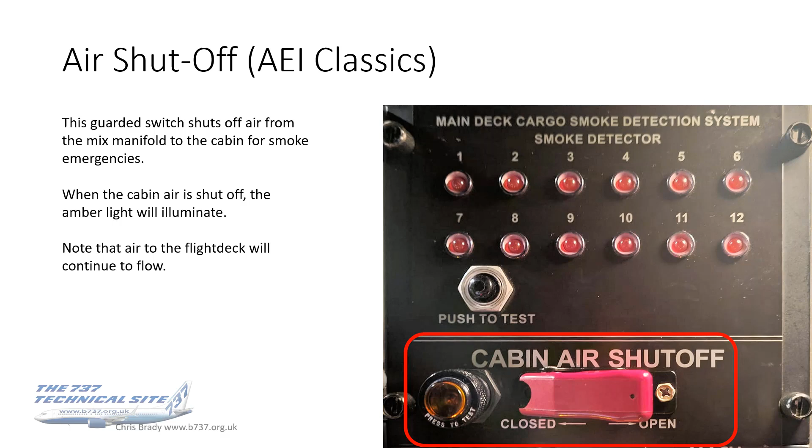Below the smoke detection panel, you've got a cabin air shut-off switch, a guarded switch, and this shuts off air from the mix manifold to the cabin for smoke emergencies. When the cabin air is shut off, the amber light to the left will illuminate. Important to note, although the air to the cabin is shut off, the air to the flight deck still flows, so there isn't necessarily a need to go on oxygen. You will still have air in the flight deck. Procedures may and usually will dictate that you do, but it isn't necessary.

For AEI NGs, the panel looks like this. It's located on the electronics panel, whereas with the Classics it was on the overhead panel. Functionality is the same, but it's got two more smoke detection zones and an A and B detector test facility rather than a single push-to-test button, so you've got two loops on this. The cabin air shutoff function is the same, but it's now labelled cargo compartment air shutoff, which is a bit more logical than cabin air shutoff, I think. It just suggests more that it's only the cargo compartment you're shutting air off to, and not the flight deck.

For BCF, the Boeing converted freighters, this is the panel. Now, the panel which looks most similar to the ones you've seen before is the cargo electronic unit, and that actually isn't in the flight deck - it's in the cargo hold. There are 3 of these, one in each cargo hold, and a third one for the main deck. This is what sends the signals to the cargo fire panel in the flight deck, with each of the 3 panels activating either the forward, aft, or main deck smoke detection system. The flight deck cargo fire panel is therefore much more simple compared to other conversions.

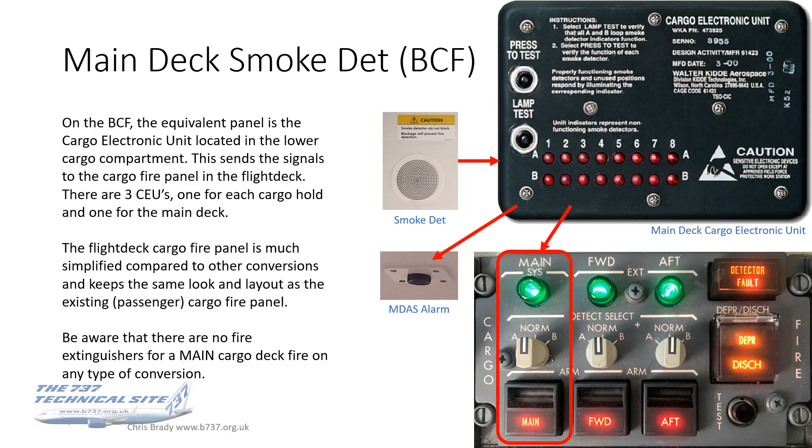Pressing the depressurization discharge button has the same effect as the cabin air shutoff switch on other conversions, so this button does the same thing as the others. It shuts off the air from the mix manifold to the cabin, again not to the flight deck, for smoke emergencies. It also opens the mix manifold exhaust shutoff valve to vent most of the mix manifold air overboard, thereby reducing pressure in the mix manifold, because if it hasn't got anywhere to go, it can overpressure. So it vents it overboard.

Again, be aware that there are no fire extinguishers for a main cargo deck fire - can't stress that enough - on any conversion of any type of 737.

All right, so let's have a look in more detail at the air system functions on the BCF.

Starting with the left, if you push the main deck cargo fire arm switch, that does certain things. It energizes the forward and aft main deck shutoff valves and the mixed manifold shutoff valve, but it doesn't change their positions. It just energizes them, because remember this is arming - it's not activating or firing, it's arming. So it energizes the solenoids for the valves, putting them in a state of readiness, ready to be operated.

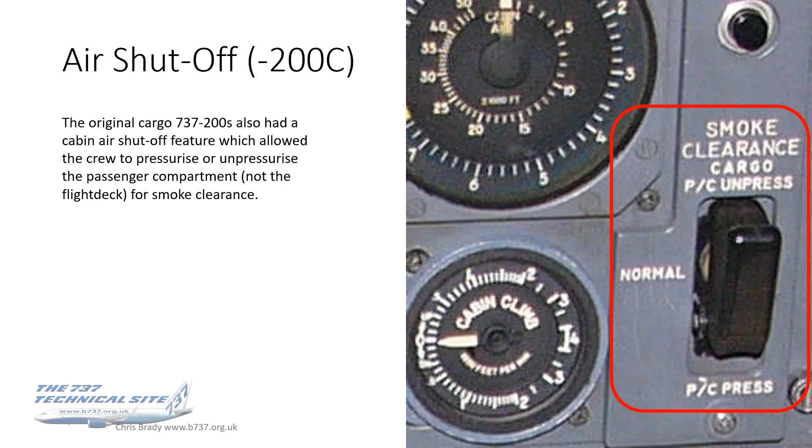I'll just say this again: the 9G rigid barrier is the main smoke barrier when the door is closed, obviously. But say, for instance, the fire was in the supernumerary area - I can't think why it would be - or the smoke had breached the 9G rigid barrier, then this is just something that could help.

The usual 4 or 5 seat supernumerary area at the front of the aircraft just wouldn't have enough seats. So this particular aircraft has got 11 seats at the back of the cabin behind the freight area, similar to a combi. So it's a kind of combi freighter, horse freighter. It's not for pure passenger, true passenger use - they are sort of supernumeraries.

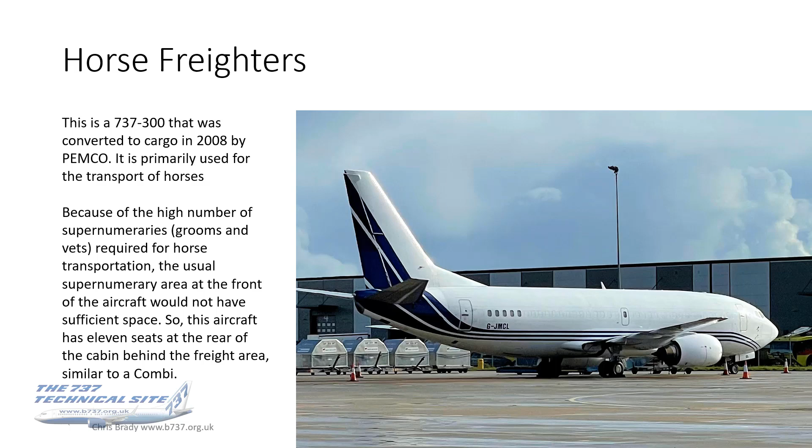In horse config, the main deck smoke detectors are switched off, and that prevents steam coming off the horses from setting off nuisance warnings. I don't know how much you know about horses, but certainly when they get excited - and obviously it is quite an exciting experience for them to go on a flight, it's all new and strange - what they do as they get nervous is sweat, and trust me, a horse can sweat a lot, and you can physically see the steam coming off them. If you've got half a dozen horses on board, that is going to set off the smoke detectors.

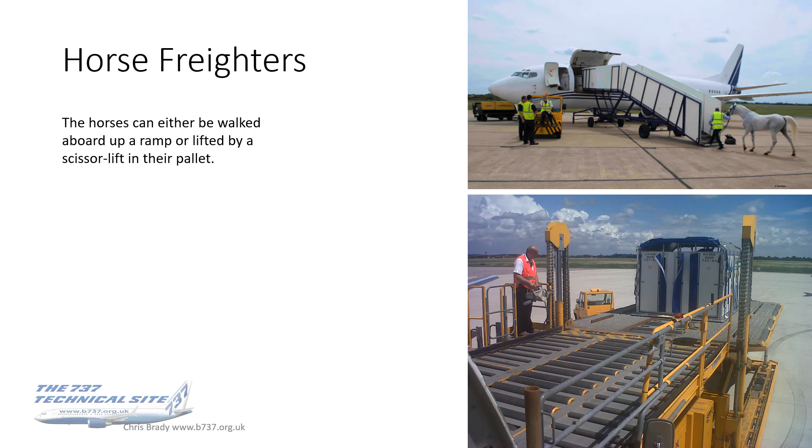All right, let's have a look at loading and weight and balance. Generally on the classics, you always carry ballast, and you always carry ballast because you often need ballast. If you're ever ferrying empty, or you've only got small amounts of cargo, you will need the ballast.

The reason for that is the weight distribution of an empty cargo aircraft versus a passenger aircraft. With an empty one, they are very nose heavy, and that's because of the weight of the strengthened main cargo door, the mechanism and weights for that, and also the weight of the 9G bulkhead. So those things combined make all freighters relatively nose heavy compared to passenger aircraft.

Now, when they've got cargo, it's not a problem - the loadmaster, or your load control, will take care of it and balance the load of the cargo in the pallet positions accordingly. But if you're empty, there's no load to balance, and that's why you need the ballast.

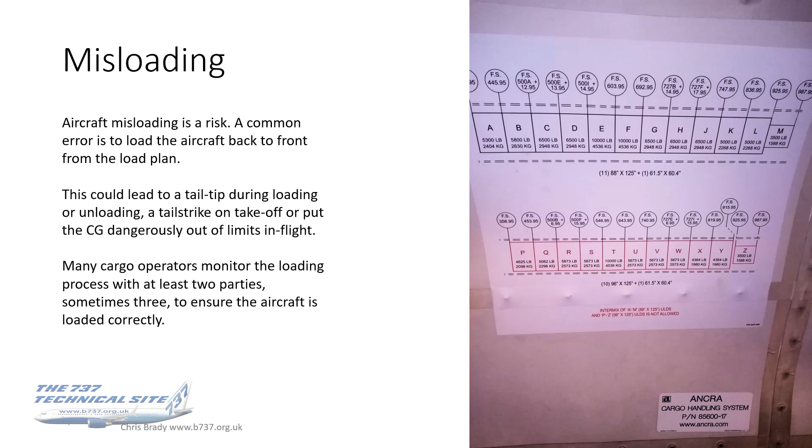The other threat with loads is a load shift, and that can put the aircraft instantly and dangerously out of trim. A forward load shift shouldn't breach the 9G barrier, but that's not to say we want to try it.

There are several procedures in place to help prevent load shifts. Starting at the load planning stage, the safest scenario is to have every bay on the cargo deck loaded with a container - that way they just don't have the room to move. Some customers do this as a matter of course, even if it means carrying empty containers, so that removes any possibility of a load shift, but sometimes it just isn't possible or practical.

Where there are void bays, empty bays without a bin, it's best if the aircraft can be loaded so that the voids are toward the front of the aircraft. That enables the location of those bays to be visually checked when loading, to confirm against the load plan. But again, this is all in the hands of company procedures and handling agents' procedures.

Now, sometimes the risk with a load shift is not an out of balance condition, but the damage that the loose load can do. We know there's a 9G bulkhead at the front, but there's also a rear bulkhead at the back, and this photograph from an NTSB report on a 737-300 in 2014 shows a stack of cargo. They're called cookie sheets - they're basically collapsed bins, flattened to transport them when not in use. These weren't secured properly, and they shifted rearwards on takeoff, causing substantial damage to the aft pressure bulkhead, such that the aircraft was not able to pressurize.

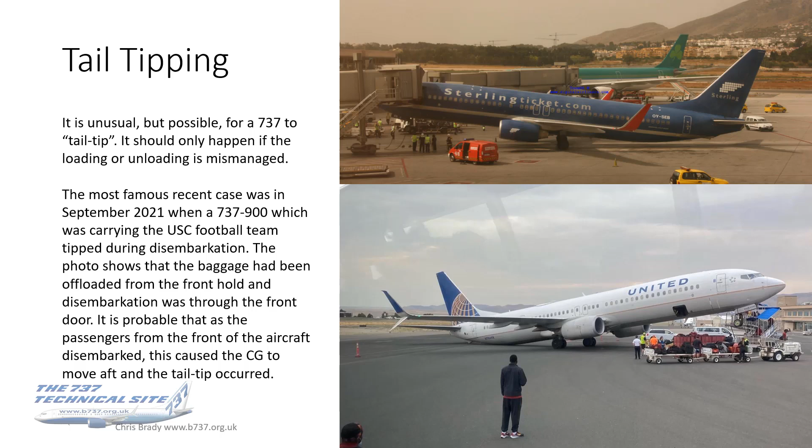The upper photo is at Malaga by the looks of it, and I forget the details of that one, but again it's on stand, so it's obviously going to be a loading incident. Now, those two events were both with passenger aircraft, but one was an 800, one was a 900. It is possible for even the short-bodied ones, a 300, to tail tip.

This is a photo of an event that occurred in 2017. Again, there's been no official report published on this, but according to statements from those in authority at the time, what happened was, during the unloading process, cooking oil in the centre of the cabin spilled out, causing the floor to become slippery. This caused the rest of the cargo to slide to the rear

and led to the tail tipping. Now, I must admit, I'm struggling to visualize how a spillage of cooking oil can have caused the rest of the cargo to slide to the rear. But anyway, that's what they said happened. Who knows? But a picture speaks a thousand words. Whatever happened, it was carrying cooking oil, and whatever happened, it tail tipped, and it is a 300. So don't think you're immune to it just because you're flying a short body aircraft. Take care out there.

Another mitigation for tail tipping is loading poles. These are more common in cargo operations than in passenger operations, but some operators do use these routinely, particularly in the longer bodied aircraft.

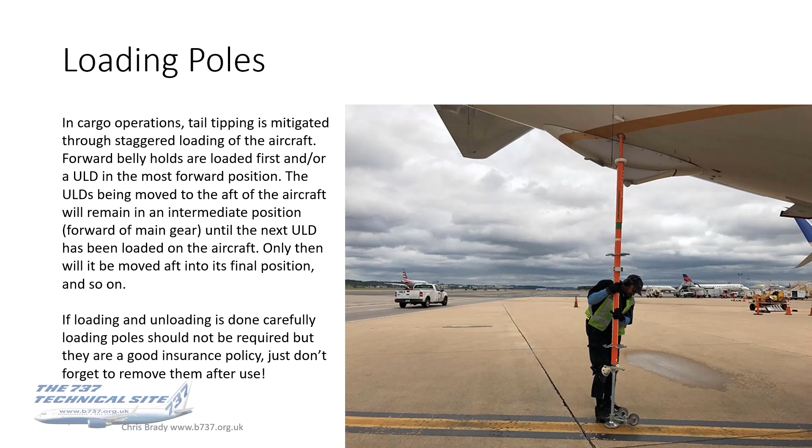If the loading and unloading is done carefully, loading poles shouldn't be required, but they're a good insurance policy. The only thing is, you're introducing a new risk, which is forgetting to remove them after use. So that could get embarrassing on pushback if that's still in place.

So yeah, unintended consequences. A lesson there in all aspects of aviation: if you're going to introduce a new SOP, then think it through and run it past some subject matter experts first.

Okay, final sections on the operation and documentation. Again, any of you watching this who aren't a freighter pilot, this will be new to you. So in the flight crew training manual, there is an expedited descent for freighter airplanes manoeuvre.

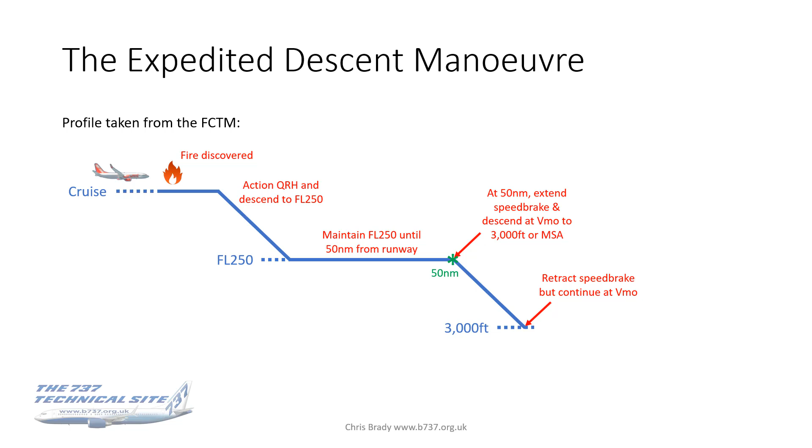At 50 miles, extend the speed brake and descend at VMO to 3,000 feet or MSA if higher. At 3,000 feet, retract the speed brake but continue at VMO. This is quite punchy stuff, being at VMO at 3,000 feet, and you maintain that until you're just 15 miles out. At 15 miles out, slow to approach speed, using the speed brake as required.

I mean, obviously, chuck everything out, get the thing slowing down. When on the glide, extend the flap and gear on schedule, and down you go. This is Boeing's expedited descent manoeuvre — the way to get you down as quickly as possible, or down to flight level 250, where you can stay on oxygen, and then as expedited an approach as you can. It is quite a punchy manoeuvre, as I say.

Being at VMO to 15 miles out is something we obviously don't ordinarily do, where most of us fly for airlines where the emphasis is on a stable approach. Clearly, in a non-normal or emergency situation, that is replaced by this manoeuvre, which I should emphasize freighter pilots are trained to do. They practice this in the sim, they're used to doing it. If one of us passenger pilots were to have a go at this, I'm sure we'd make a holy mess of it first time round. So those of us not flying freighters, don't try and put this in your repertoire unless you've been trained for it. Leave it to those guys.

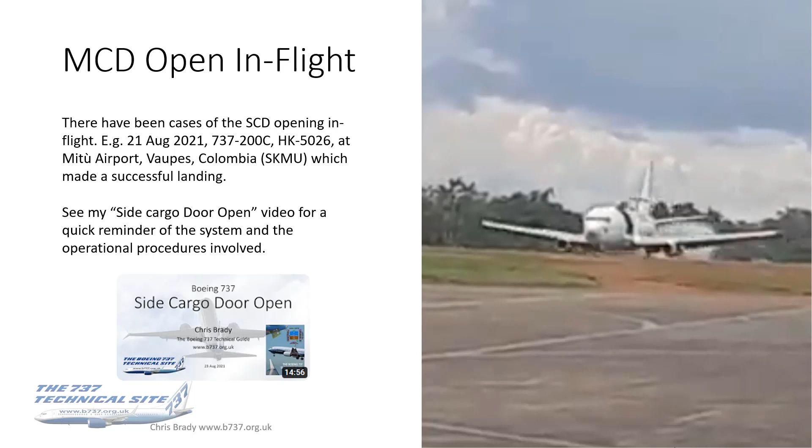The other operational emergency, I guess, peculiar to freighters, is the main cargo door opening in flight. There have been cases of this. The last one was in August 2021, a 200C in Colombia, which completed a very nice circuit and made a successful landing. I did a video on this a couple of years ago on side cargo door open, if you want to see it, and in there you have a quick reminder of the system and the operational procedures involved. I'm not going to repeat it here because it was all covered in that video.

All right, so to finish off, let's just have a look at the documentation differences. So as regards the AFM...

And there's a similar document for the AMM, the maintenance manual, and also for the wiring diagram and all of the other manuals. This supplement contains information such as any new aircraft limitations, for example main cargo door operation, wind limits and those sort of things. Also modified system descriptions, so again the hydraulic system, smoke detection, that kind of thing. And any new modified normal, non-normal and emergency procedures, such as the ones we've been talking about, the main cargo door open in flight, or

the smoke procedure. The information in the AFM is reproduced in the FCOM and the QRH in a format more familiar to us on the line as line pilots. Most line pilots have not actually seen an AFM, and it is quite a dry old document. What we get is the pilot-friendly version, which is the FCOM, and of course the QRH.

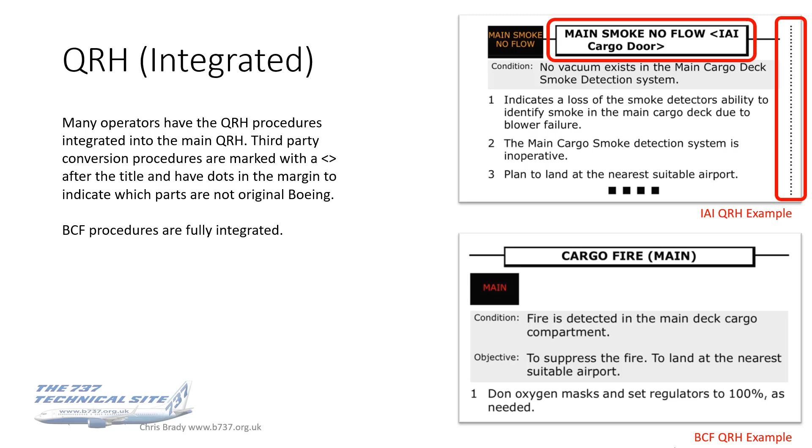It's fully integrated. That again, I take you back to Boeing's selling procedures - one of their main selling points is that everything is fully integrated. FCOMs, like the QRHs, may have separate supplements or descriptions and procedures integrated, but they're marked with the brackets to indicate that they are third-party procedures. They've also got the dots down the sidebar, same as the QRH.

Again, BCF aircraft, Boeing converted freighters, they've got fully integrated QRH, FCOM, AFM, maintenance manual, etc. No annotations, no dots, no brackets, fully integrated, and that again is one of Boeing's real big selling points. It's all seamless.

That is it. That's everything I know about freighters.